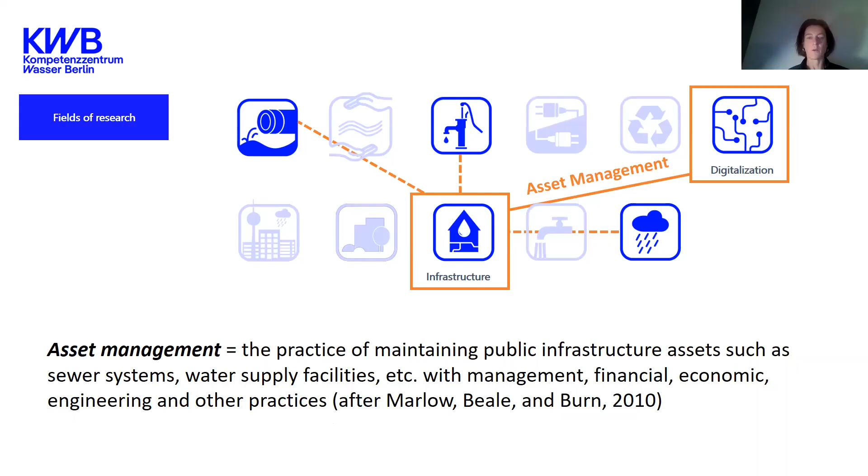And you will see we are working on 2 topics. The most advanced one is the topic of sewer systems, and the second one is the topic of drinking water wells. Our experience began in 2012 with the evaluation of the performance and applicability of sewer deterioration models. We continued our work with the development of model tools for sewer rehabilitation and inspection planning, with the optimization of sewer inspection and rehabilitation strategies, and the quantification of uncertainties in sewer deterioration models. We fill the gaps in some data sets and transfer our methodology and tools to other cities than the one we began to work with.

And we are also working on new indexes for evaluating the condition of sewer pipes. And now we have a new topic that really profits from our former research. We are now working on the aging forecast of drinking water wells. We cooperate with network operators, research institutes, and engineering consultants from Germany, France, Bulgaria, USA, and Colombia.

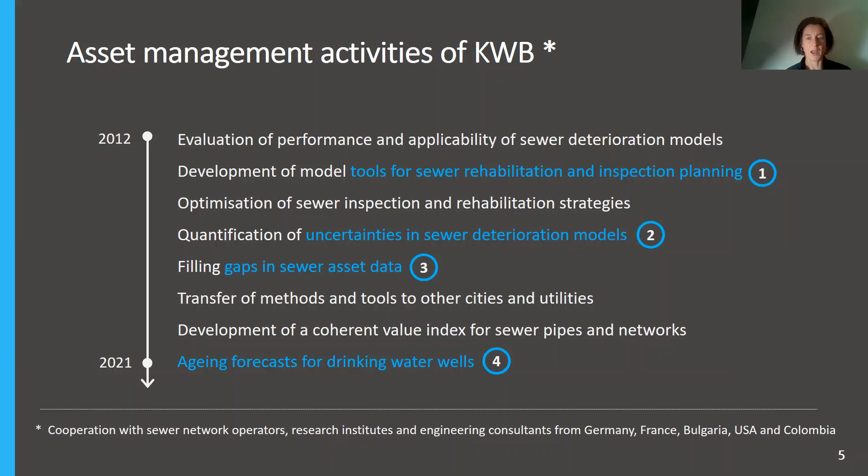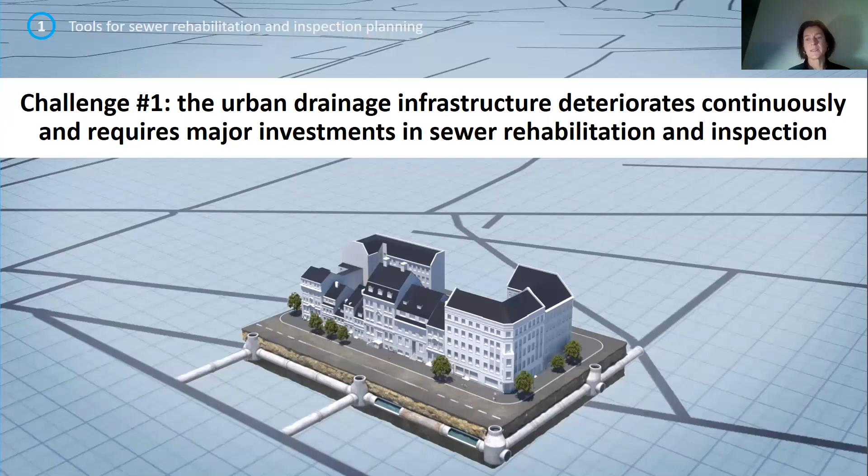The first topic I wanted to present is the tools for sewer rehabilitation and inspection planning. With these tools, we address one of the main challenges for the operators: the infrastructure is deteriorating continuously, and they need to invest a lot in the rehabilitation of the sewer system and, of course, in inspection. In this context, and in collaboration with them, we developed 2 types of tools that they are now using really actively.

One tool enables predicting the condition of the sewer today for the pipes where you don't have any idea of their condition. This tool, called SEMA Plus Pipe Simulator, answers questions of the operators. The first one is, what is the real condition of the network today? Where is the greatest risk of failure? Where do I have to conduct a systematic inspection?

The second tool that we have developed is the SEMA Plus Strategy Simulator, which is really forecasting the condition of the sewer system in the future. In this context, we're also answering questions of the operators: how will my network condition develop in the future? Which investment in which strategy do I need for a secure network operation? And what is the maximum target condition I can achieve with my current resources?

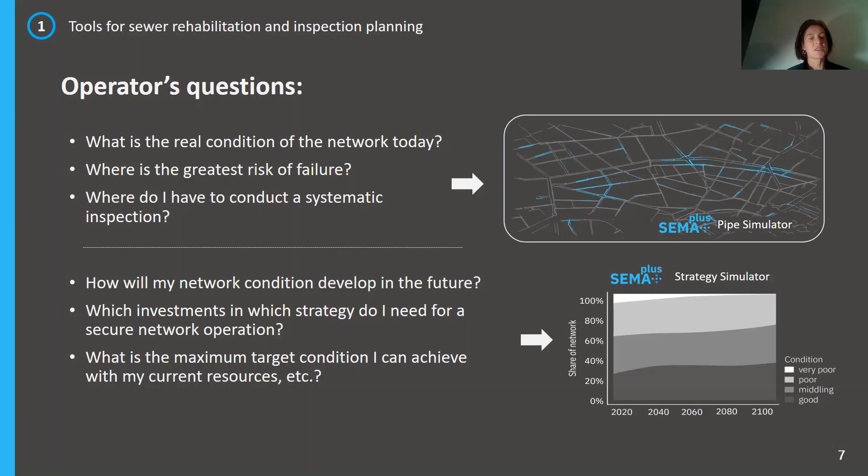The SEMA Plus Pipe Simulator enables prioritizing the pipes with a high probability of severe defects for targeted inspection and rehabilitation. It is based on the machine learning model that we developed considering all the data that we had. We did that for the city of Berlin, and we had a lot of information about the sewer characteristics, such as sewer length or material and so on. But we also considered some environmental factors. And with that, you can see the red pipes, the pipes that are predicted to have severe defects and that could be inspected first.

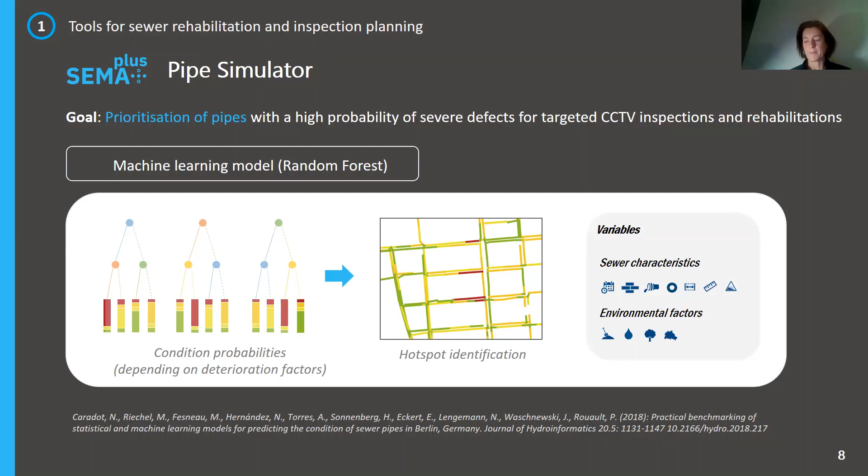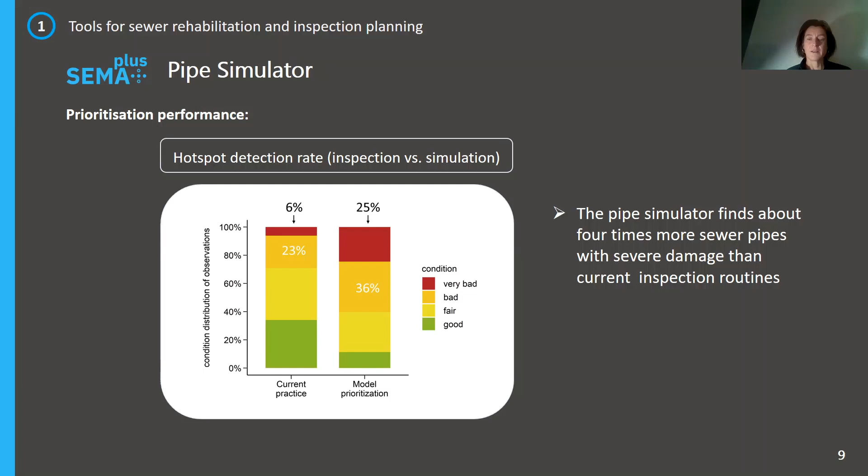So please have a closer look at this picture. You will see this color code a few more times in this presentation. The red really represents sewers in very bad condition, and the green one in good condition. And we have been working with 4 categories, but of course it's possible to work with more categories in some other situations. So what we can see is that the pipe simulator had about 4 times more sewer pipes in severe damage. And so it enables the operators to have a more efficient inspection strategy.

Let's have a look now at our SEMA Plus strategy simulator, which is doing long-term prediction for sewer network condition and strategic rehabilitation planning. This tool relies on some other models. We are working this time with statistical survival curve models and not with machine learning models, because we want to predict the situation in the future. So it's really better to use this kind of model.

And what we are considering is these so-called survival curves that really say what part of the sewer system is in which condition depending on its age. And we have some information for different kinds of sewers. For example, if you have a sewer with brick materials, or you have some clay sewer for stormwater and so on, and depending on that you can define some different survival curves.

What we also consider for predicting the evolution of the sewer system is the impact of some different activities. So for example, the renovation, or if you repair, what will happen with your sewer system. And what we also consider is some external influences, for example, if you are not able to rehabilitate or to do the work that you'd like to do, because you need to do some works because of, for example, street repairs or something like that. So you have some external boundary conditions that you have to consider, and these conditions can also be considered in our strategy simulator.

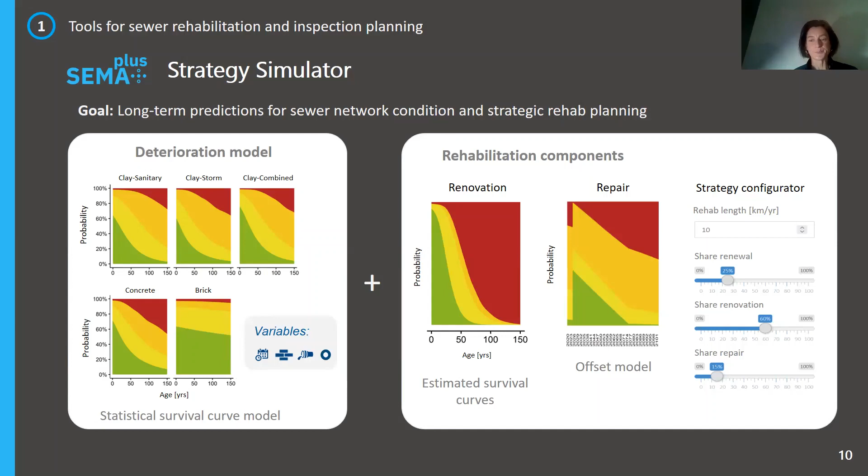Of course, we don't only calculate this number, the share of pipes in which condition. We also give some information about the price, about the age of the sewer system, so we can do some other evaluations, but I think that's one of the evaluations that is really important.

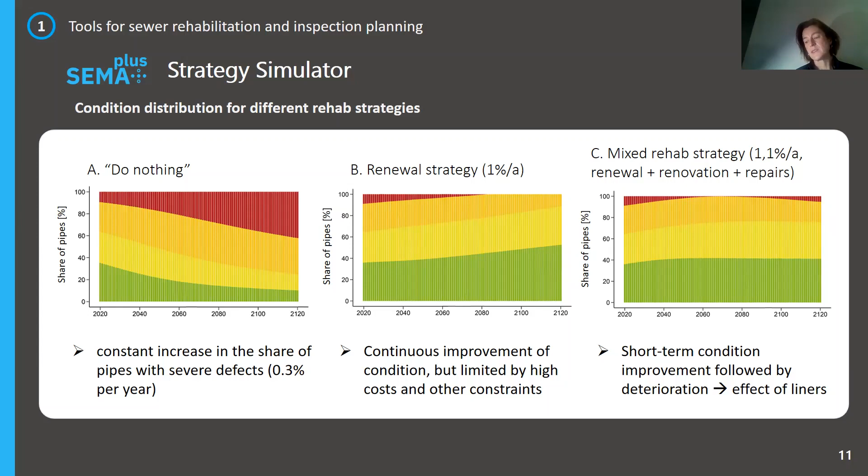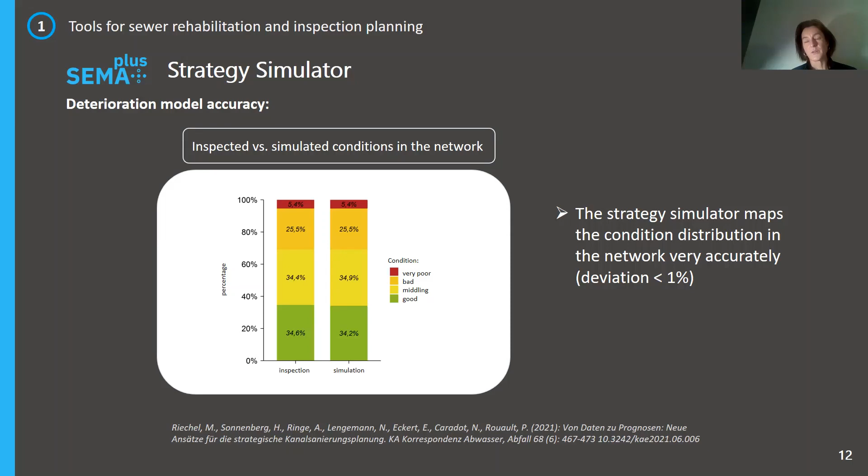Important is to know that we developed these tools only because we're able to trust the models that we had to do the prediction of the condition of the sewer system. In the work that we have done on that, we could notice that the prediction only had a deviation of about 1%. So we are so happy with that, that we were able to have the trust of the water company and to rely on that to develop the tools.

A second work that we have done is to work on the model uncertainties. And what we wanted to do was first to identify the uncertainties and to quantify the uncertainties. So the identification of the uncertainty showed us that, of course, the subjective condition assessment can be a problem and source of uncertainty. Low data availability for some types of sewers, for example plastic pipes, or you can have some uncertainties due to survival bias.

And what we were able to do is to predict the uncertainties for the different strategies. So at the end, you do not only have what will happen with the strategy, but also what kind of uncertainty you can have with that. That enables the operators to also reduce their uncertainties if they want to work on them. And I think it's a very valuable result for the future and for the operators.

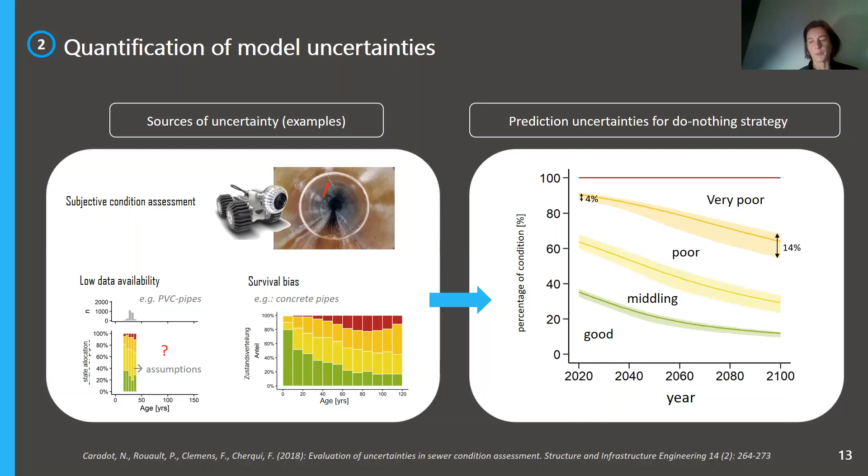Another work that we have done is to fill the gaps in the sewer asset data. As you know, every city has gaps in the data. For the city of Berlin, for example, we were missing about 12% of information on the age of the sewer, and of course it's a source of uncertainty for your prediction.

We work with two types of models to fill this gap. The first one, and I think the most powerful one, is to work on the nearest neighbor. But what happens if you don't have any neighbor? Then for that, we developed some random forest model based on some other information, for example, the age of the pipes in the catchment, in a bigger catchment, and so on.

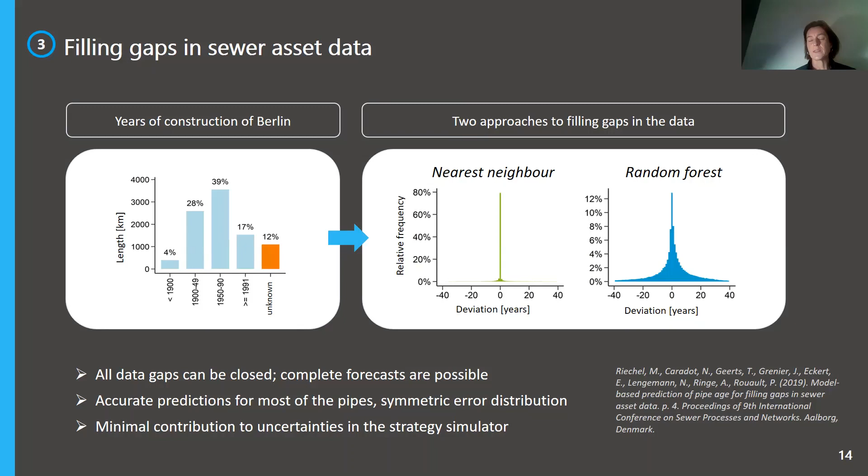But I cannot go into details on that. What is important to notice is that it was possible to close the gap and to do some accurate prediction for most of the pipes. And so we can really reduce uncertainties for the strategy simulators based on that.

The second challenge for the operators is the challenge of managing the drinking water wells. In Berlin, we have about 650 water wells, and their capacity is decreasing with time, due to iron ochre formation, biofouling, or clogging. What does it mean? It means for the operators that for a given water demand, it requires a higher energy consumption. So that's a critical topic now.

And what does it mean? They have to work on the maintenance. They have to work on their well renewal strategic planning. But at the moment, they don't really have the possibility to do strategic planning on that. And that's why we decided to rely on our experience and to try to use the kind of models or knowledge that we developed on sewer asset management for the wells.

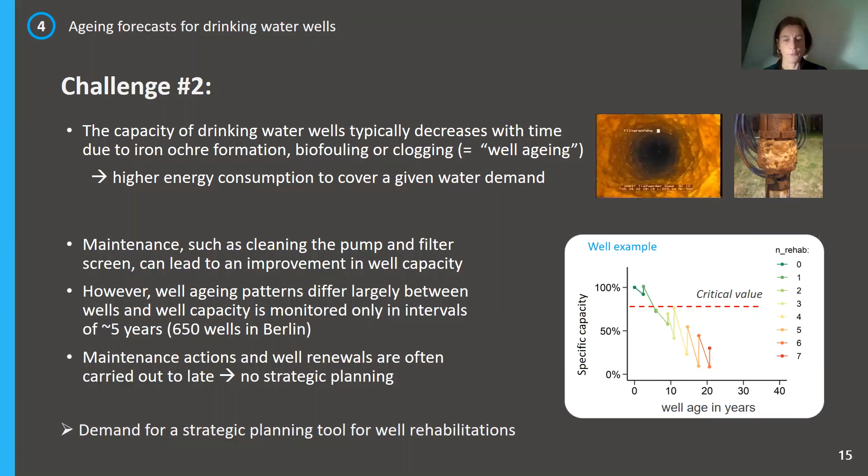What we did first is to really understand the data. And in this context, you have many different types of data. Of course, the well age, which is important to predict the aging, but also the number of rehabilitations, some operational context or information, and also some water quality factors that can really influence the aging of these wells.

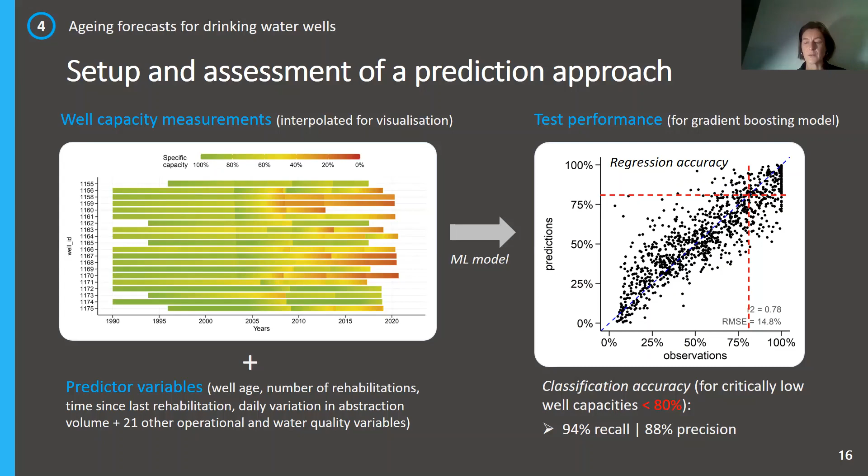And then, based on that, we were able to better understand and develop a machine learning model that enables us to predict the efficiency of these wells. That's the picture that you can see on the right side. What we can also do now is really to predict the well capacity.

And as you can see on this picture, at the beginning you have a capacity of 100%, which is decreasing. And if you are doing some maintenance actions, you can come back to this 100%. But if you are under a specific critical value, you cannot come back to this capacity. And so now we are able to simulate and predict the situation, which means that we are able to better predict the maintenance and make strategic decisions based on that. But these are really our first results, and we are continuing to work on that.

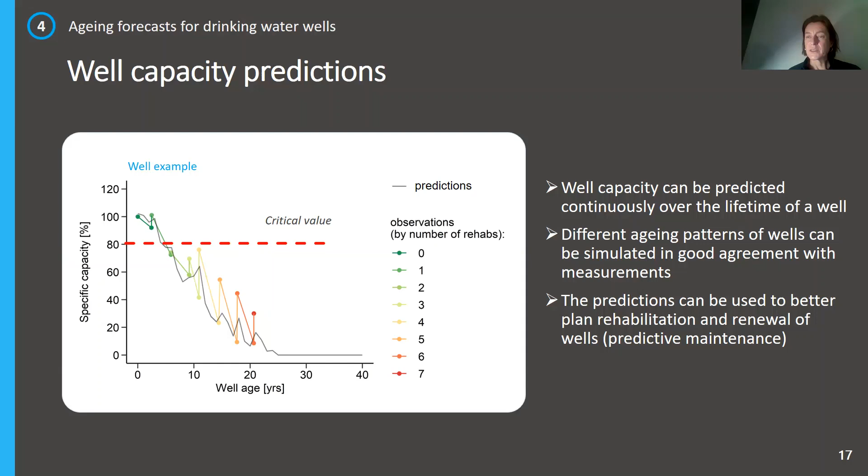My conclusion is that digital tools can help to solve two important challenges in infrastructure asset management we worked on. The SEMA Plus simulators can support utilities in strategic planning of sewer rehabilitation and inspection programs. Important uncertainty sources and countermeasures are identified. Data gaps can be filled with reliable machine learning-based prediction models. Machine learning-based prediction of well capacity can help to plan rehabilitation and renewal of wells and reduce maintenance costs and energy consumption.